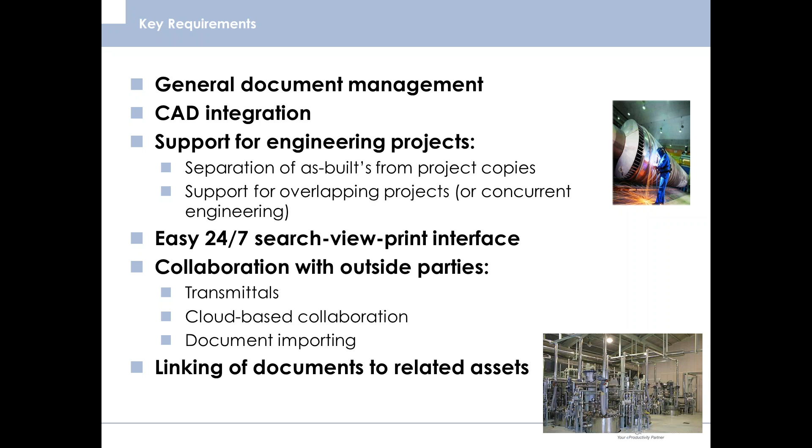We talked about having an easy 24/7 search, view, print interface where you could search for a drawing, but typically you're searching for a drawing that relates to a specific piece of equipment. So you might know the tag number on the piece of equipment, and from there you want to get the documents. It would be much better if you could just go to the piece of equipment you're interested in and automatically grab all the documents for it. That's something else we're going to be discussing and showing in the presentation.

In the demonstration coming up, you're going to see a typical scenario where, via Maximo, an example maintenance or asset management system - there's others out there, SAP Plant Maintenance, Oracle, Archibus, really works the same with all of them - maintenance locates and marks up a drawing for a small required change. Once they've done that markup, engineering automatically receives an email notification of the markup from maintenance with a link to the marked up document.

Engineering will then see that this drawing, where maintenance is requesting or notifying of a small change, is actually assigned to a major project. So now we've got some concurrent engineering going on. The drawing is going to be assigned to a work in process folder designed for handling small changes like this.

The new master or as-built is going to be updated when the small change is done, and then it will be flagged and notified that, as a result of this, the copy of the drawing being worked on in the major project folder is out of date. It will be flagged so that the major project copy can be synchronized with the newly updated master or as-built. So you're not getting those changes all out of sync with each other and then, down the road, have to try to put it all back together again. And then work on the major project can continue.

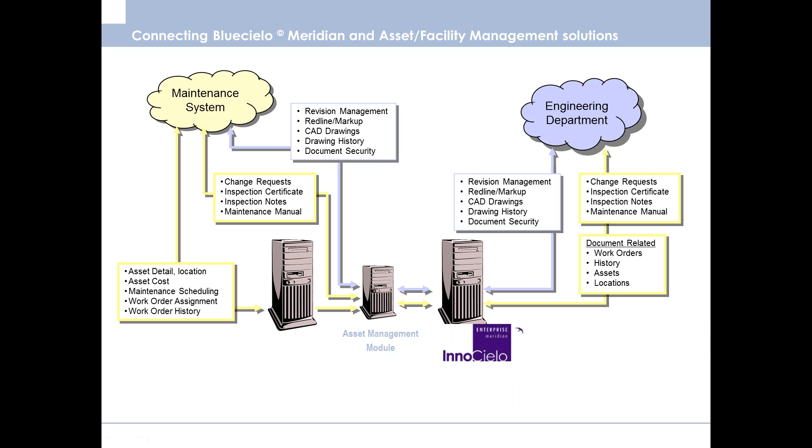You can also do your maintenance scheduling and work orders, where the idea is either from an asset record or a work order record, click a button, and you've got all the documents related to the piece of equipment in a single click. Here you can see inside the Maximo client, we can see our equipment record, equipment number, its parent, description, supplier information, replacement costs, and then with the click of one button, this window will come up, and here's all the drawings and documents related to that piece of equipment.

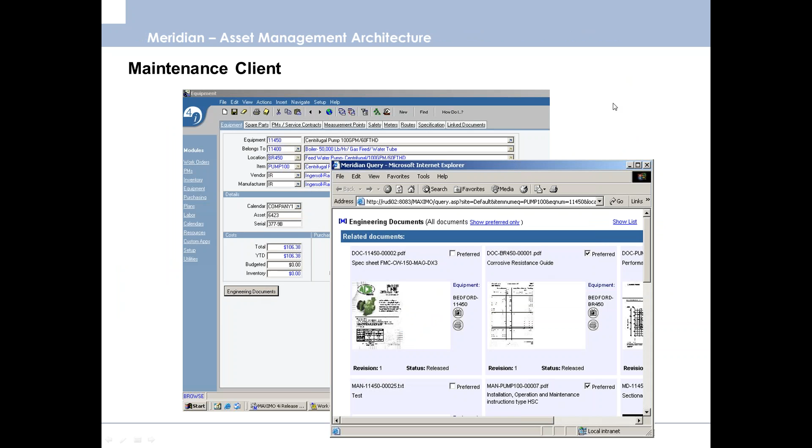This information and these links and relationships are available inside the main Meridian desktop power user client or power web client. Meridian has a 24/7 search, view, print client called the Explorer, and all of the equipment records, documents, and their relationships are available in there, or again can be retrieved directly from the maintenance system user interface.

So I think the advantages are kind of obvious. Maintenance is more productive, with more wrench time, because before they do something, they're not having to search around through computers or file cabinets to find documents. They also don't have to go into engineering to get help finding the correct document, which keeps engineering more free and productive. So your equipment repairs get done more quickly, downtime is reduced, and there are fewer errors because people aren't using incorrect or outdated documents, which relates to better plant safety, better maintenance of certification, and licenses to operate.

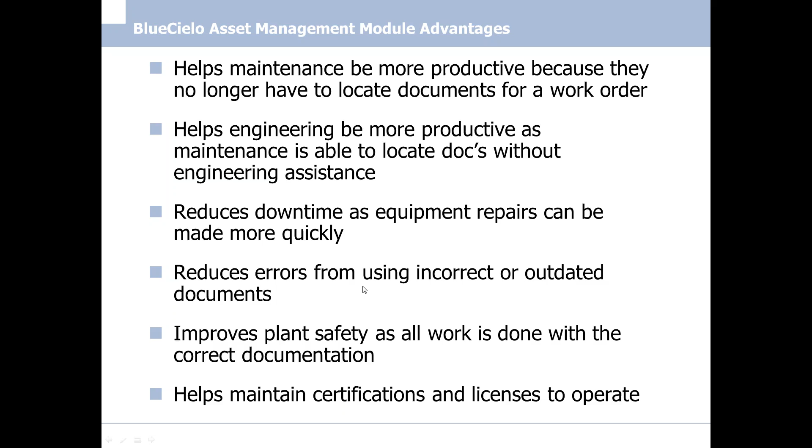The current process, of course: maintenance planning creates a work order, maintenance operations receives the work order, then they've got to go find the documents, which is a non-value added task that may require engineering assistance, then they do the work.

With the asset management in place, maintenance planning does the work order, operations receives it, and they don't have to go looking for drawings, they just go right to work.

Now just to get a quick introduction to what this looks like inside the main Meridian Power User client that engineering would use, we're going to take a look at a quick presentation here.

In this video, we will be looking at how BlueCielo can be used to manage engineering content in relation to your asset management system. Basic knowledge of the BlueCielo Power User Client is recommended before viewing this tutorial. For this demonstration, we will be using a BlueCielo Vault that has been configured with the BlueCielo Asset Management module, which is used to connect engineering documents in the BlueCielo Vault to objects and tags in your asset management system.

The BlueCielo Asset Management module adds the following predefined folder structure to the BlueCielo environment: Tasks, built to manage the functional plant structure; Objects, to manage all objects like control loops, tags, equipment, pipes and lines; and Projects, for design, engineering, and construction projects.

At this point, I want to get into the integrated demonstration with a presentation from Chris Angridis from BlueCielo ECM Solutions. First off, we're going to take a look at the first part of our demo workflow, where maintenance is in the asset management or maintenance system, finds a document, marks it up, and submits it to engineering. We'll take a look at that here in just a second.

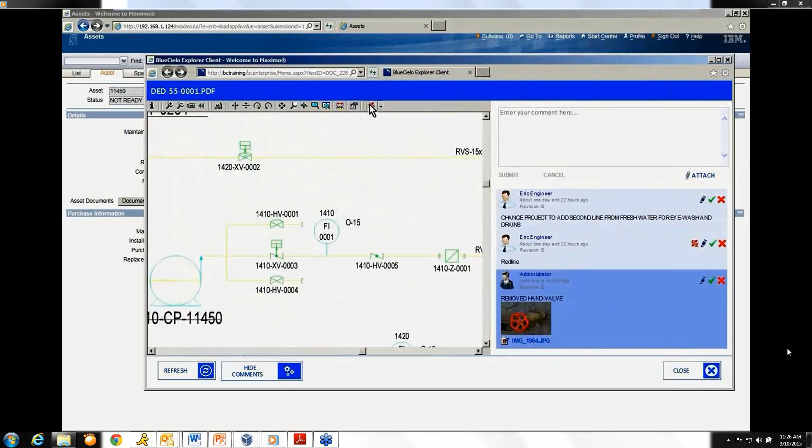What I'm also going to do is mark up the drawing and show where on this P&ID the valve existed. So I'm going to zoom into the area that I'm going to redline, and with the markup tools, denote that this valve was removed, and even add more information here. For example, removed hand valve, no longer in use. Okay.

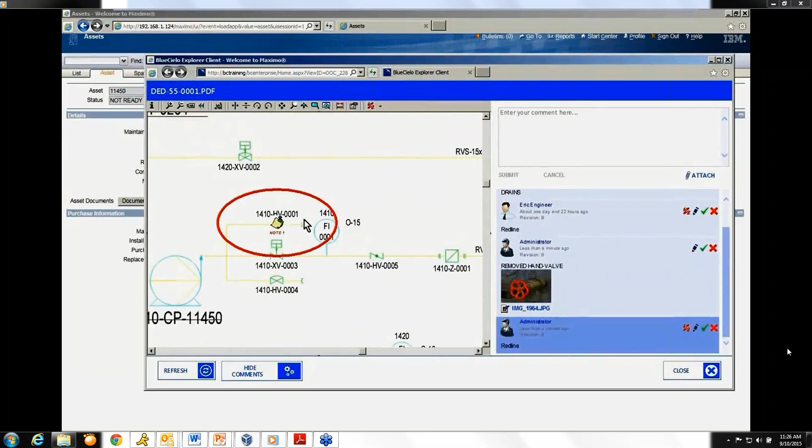And this note, of course, is going to stay with the document as the document and commenting progresses. What's interesting is that my red line I just created here, let me zoom out so we can see everything, is actually independent of the red line from the engineer user. I can click on either one of them, and I can see independently which red line was made by each person. Okay, so let me close that, and I'm going to go back to the presentation to see where I am.

All right, so that's the first part of our demo where we've seen how maintenance has used the tool to find a drawing, do a markup, and submit it to engineering.

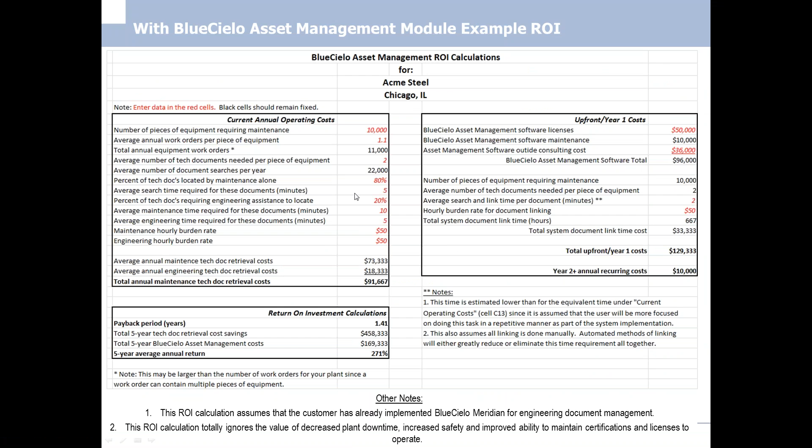What we're going to see next is engineering making use of the Advanced Project Workflow module and its concurrent engineering capabilities to find that the change maintenance has made affects a drawing that's actually out for change on another project.

That gets really complicated in being able to manage those overlapping ongoing projects while keeping the as-built available for maintenance. And that's what this tool is designed to do.

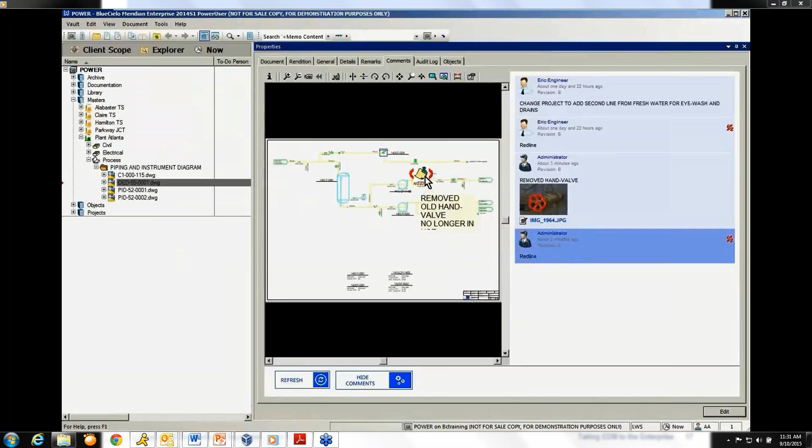This change was made by the maintenance person. So we'll make a decision here to go ahead and make this change. Now, at the same time, let me click on the document tab.

We see that there's actually another project copy checked out. From this perspective, the engineering manager can see the other project copy. For example, in this case, this is the master document, and clicking on the project copy shows us it's in the major construction project, and we can see what's going on with those.

We can compare those documents as well. I'll compare this a little bit later on when we make changes to this document as part of our maintenance change. So I'm okay with that, and now we're going to go ahead and add this document to a work in progress project, which is a small work order project.

From the context menu, the engineering manager can simply create a project copy. In this case, we're going to be creating a second project copy. The first one is in the major construction project. We're going to go ahead and make one in the work in progress, for example, a small work order project.

This dialog box is pretty interesting because the master document has a couple of CAD references. A pump and a vessel document are being referenced into it as a CAD reference. In this case, we want to copy these into the project as well because they might change. In this case, those are not going to change, so I'm going to leave them where they are. That's very powerful, allowing me to take those reference documents and put them into the project as well.

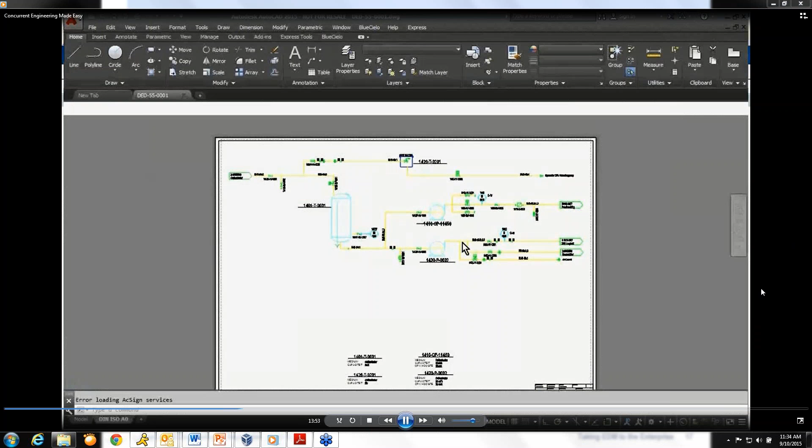We're going to make the changes in model space, so let me switch to model space and zoom into the area we're going to make a change. The simple change we're going to make is simply removing this hand valve, and just press delete.

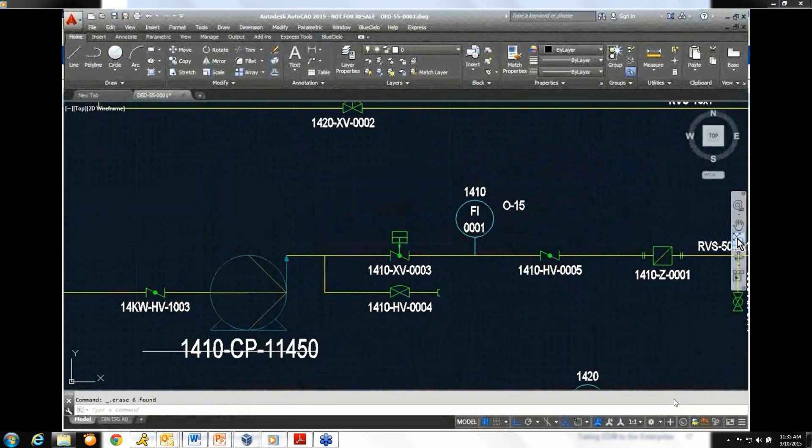That is done. If we're done, and in this case the designer is finished, we'll zoom out and make sure things look okay in the layout. If we need to, we can always update the vault or update the properties from Meridian directly from our CAD application, and this also works directly from the web application too.

So let's close our document, and we'll minimize CAD because we're going to use it later. As far as the designer is concerned, they're finished. They simply upload the document to the server and pass it on to the next step of the workflow.

For example, in this case we're going to go ahead and start the review. Now the review process depends on the design, and on any kind of workflow process or mechanism you guys have configured. In this case, I'm asking the designer to say, hey, what is this change for? It's for an as-built.

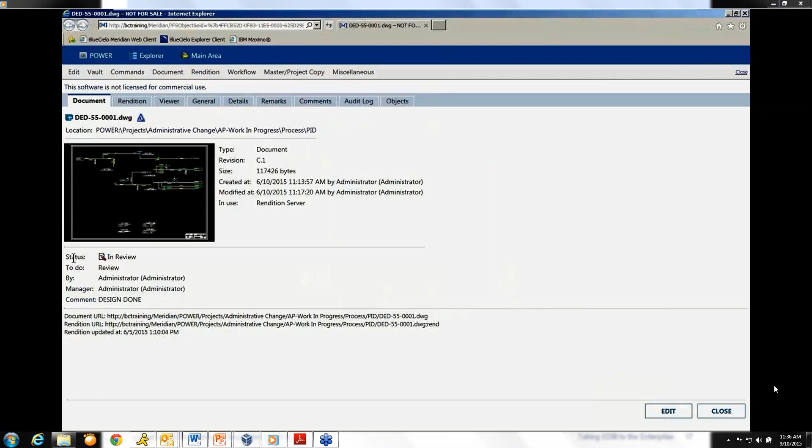As far as the designer is concerned, they're done. They can close this card. For example, this document is now in review, and they can close this card and go on to work on other documents in their projects. Using the navigation capabilities, they can filter and show only their documents and continue working.

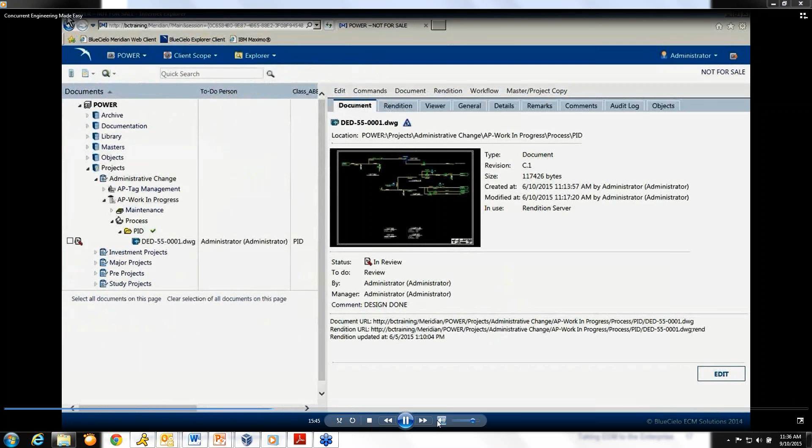So let's leave the designer from their home office, and we'll go back to the corporate office where the engineering manager is checking their email. We see that they are now the to-do person for this document, which is now at revision C1 and needs their approval. Very simply, we jump to the Power User Client, and again these links put you directly on the document at hand. For example, in this case it's our project document, and it just needs to be reviewed.

Let me turn on the viewer to make sure the geometry is up to date. Yep, looks like the geometry is up to date from our designer. In this case, what I'd like to do is compare the documents and see what kind of changes have been made, especially compared to the last released or even the next project that's out there.

To do this, I'm going to use the project browser again. I can compare one project copy - I'm going to hold down the control key and highlight the next one - to see what needs to happen to this document to compare it to this document, which is my other project copy. We'll get a compare window that shows us the original document, which is the one our drafter just changed, in the top left, and the next project copy in the other window. In the third window, we'll see all the changes.

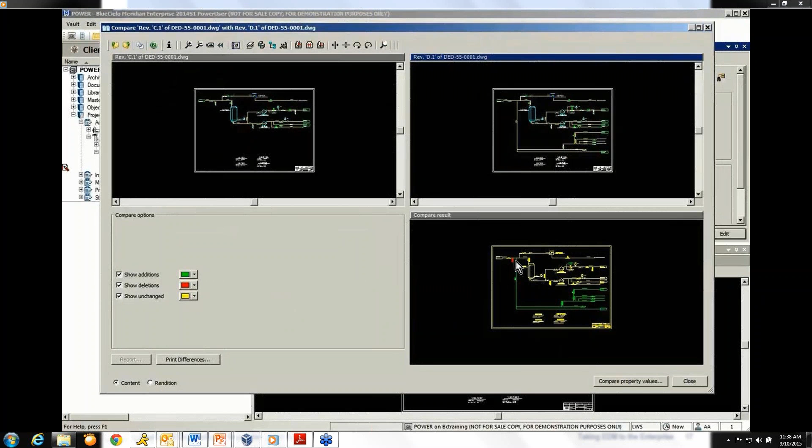I'm going to zoom into a part of it here, and we see that the valve we removed is still in the other project copy. We see the other project also added another line and also removed another valve here. Very easy to see and compare.

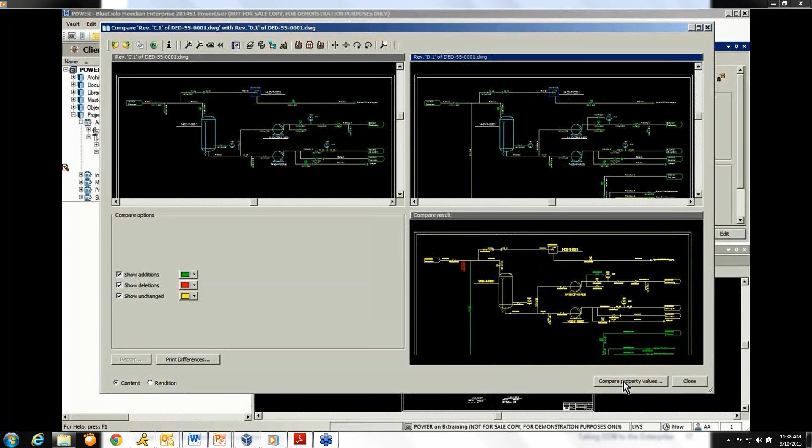Also, the comparison goes beyond that - it goes into the properties as well. For example, we see the revision number has changed, and also the properties have changed, like the title. So all those comparisons are available. We're done with that, so let's go ahead and close it out. From the perspective of the manager, we're done, and we go ahead and approve this document.

And this approval status is approved. We're done.

So now we're ready to release it as a master. In this case, we're going to notify everyone that's interested, for example the maintenance workers. We're going to go ahead and tell the system to release the document as a master.

Keep in mind that this is the very first document being released. In the next project, we'll see that these options may change because we now have a new master. We'll get to those in a second.

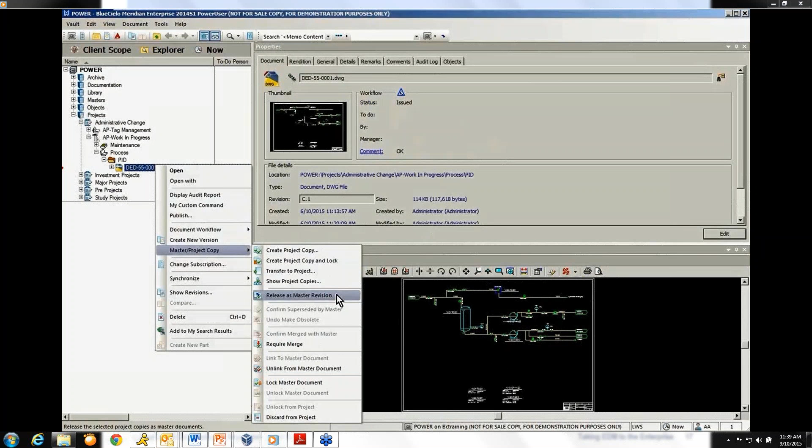As soon as we do this, notice one thing happening in addition to all this: our project copy is automatically put into an archive location. This archive location can trigger your company's document retention rules. We'll go ahead and shrink this out in a second.

Now we see our brand new revision, our brand new master, and we can see that this document now has one project copy checked out, which is the major construction project. It's all red with notifications saying that the master document has changed since this project copy was checked out, which is very important.

Okay, so let me pause for a second. Alright, hopefully that gives you a good idea of how that process works. Now I want to jump ahead and show a couple of the tools available to merge in those changes. So we're going to move to that area next.

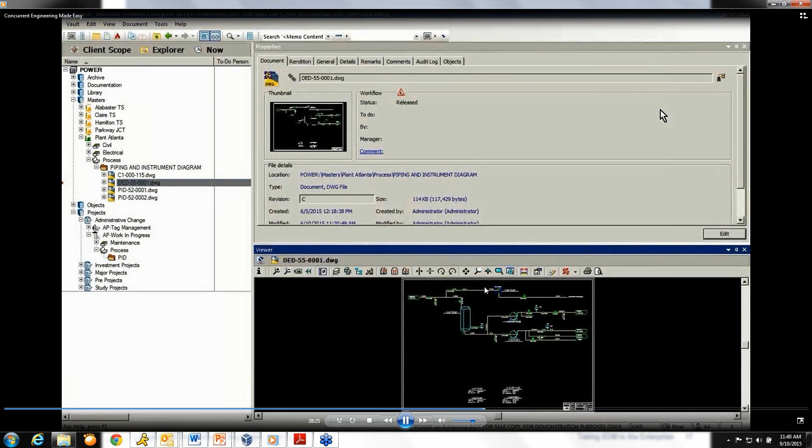We're done with email for a while, and here we are in Meridian looking at the latest master of this drawing. And we do see that we have a project copy checked out still, and this is our major project copy, and we compared it as well.

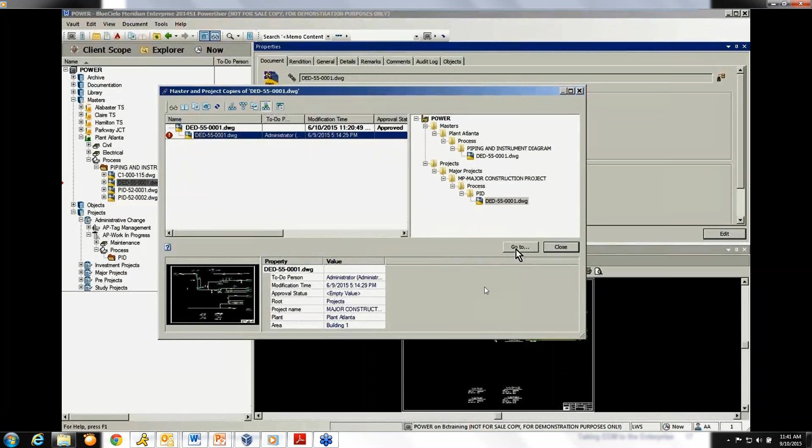So we know we need to give it some attention before we release it. Now, the changes that have been incorporated here are the ones that came back from the contractor. So what I'd like to do is jump to this document, and what we need to do now is essentially merge the changes and then release this as a new master.

Now, how do I know we need to merge the changes? Some of the concurrent engineering functionality that's implemented allows the user to check on this and know what's going on. For example, I am not allowed to release this as a master just yet.

That option is not available because we have a newer master than this project copy. That's very important. So what we need to do is confirm that we merge the geometry, and that's what we're going to do right now.

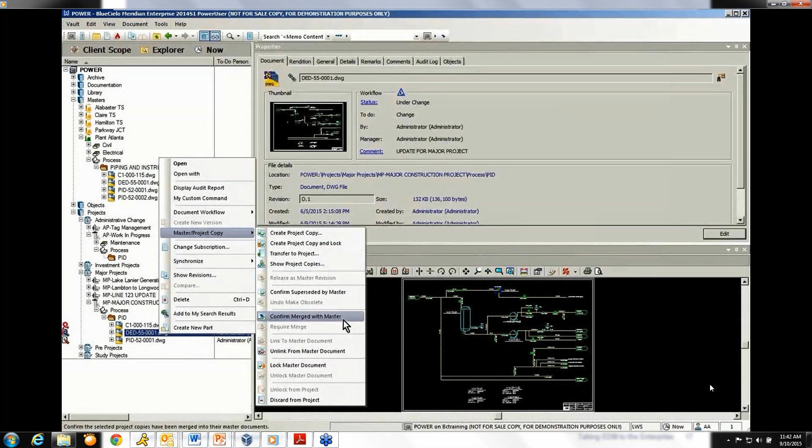So at that point, the merging is really an AutoCAD function where that main project copy is edited, copy, paste, edit, either from the new master or from the project copy. Then you can confirm that it has been brought up to date, so you can continue on and release it as a new master when you're done.

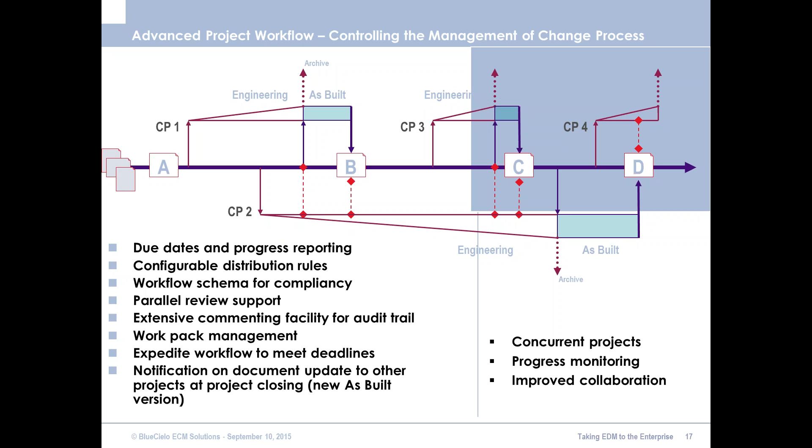So hopefully that gives you an idea of the tools and how that works, and hopefully that's ringing some bells with the kind of workflows that you do within your organization and some of the challenges you have. Again, this summarizes the workflow that we went through.

But one thing here is, this was all really done as kind of an internal, inside-your-company workflow. However, as we mentioned at the beginning, a lot more work is being done outside your organization, and that's where the BlueCielo Meridian Project Portal comes in.

So far we looked at master data in our masters or as-built folder, work in progress data inside project folders, and using the advanced project workflow. All of that information is in the Meridian system on your internal network.

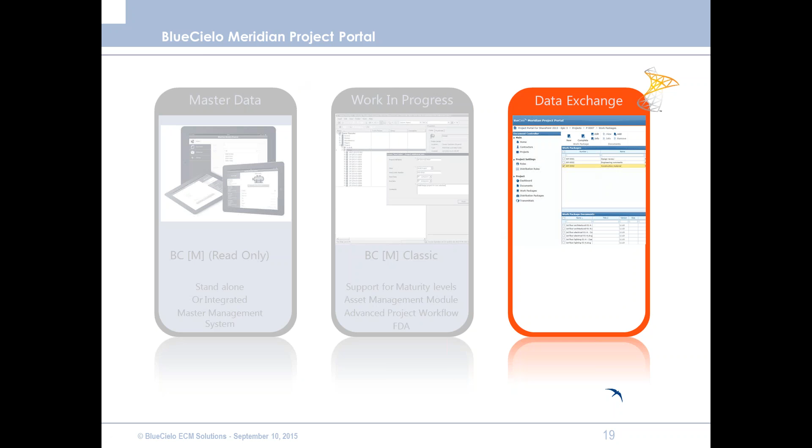But now with the project portal and its data exchange capabilities, it extends all this functionality so that you can integrate work from outside engineering firms and contractors into that same workflow.

The project portal is not actually released yet, it's coming out this fall. I want to go ahead and preview it and talk about it a little bit. It's really designed, as this graphic shows, for really complex supplier networks.

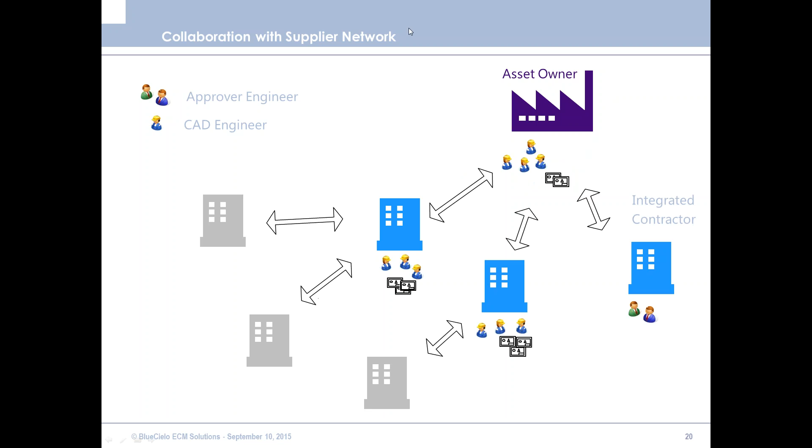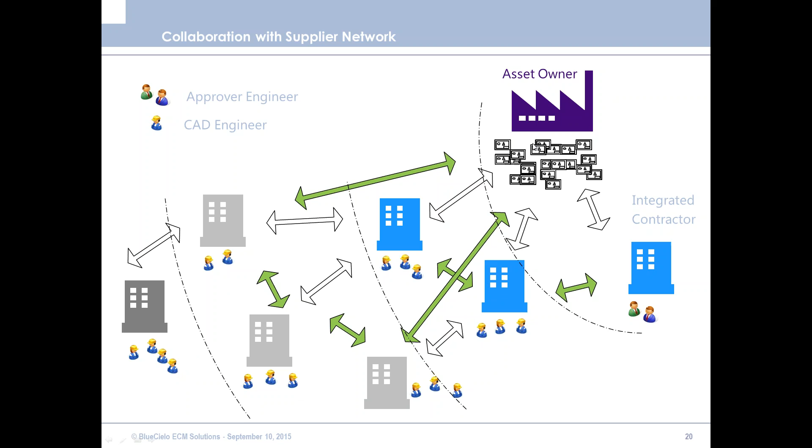So a company's got multiple first-level suppliers sending information back and forth with the contractor, and those first-level suppliers may have suppliers of their own. The project portal is designed to synchronize down to multiple levels to keep your projects on track, and then all the changes synchronize back to your vault.

Some of the key capabilities of the project portal: it gives notifications. In the project portal cloud, there's viewing and redlining capabilities built in, full audit trail so every touch of a document by an outside party is tracked, the ability to mass upload document changes in batches and read data from an Excel file, tools for work package handling, setting up recipient lists, setting due dates with reminders and warnings, gathering online reviews, gathering comments, doing submittals, and lots of reporting and dashboards built in.

The project portal actually has its own full document control environment there in the cloud, but then it can also be set up to automatically synchronize with the Meridian server in your office.

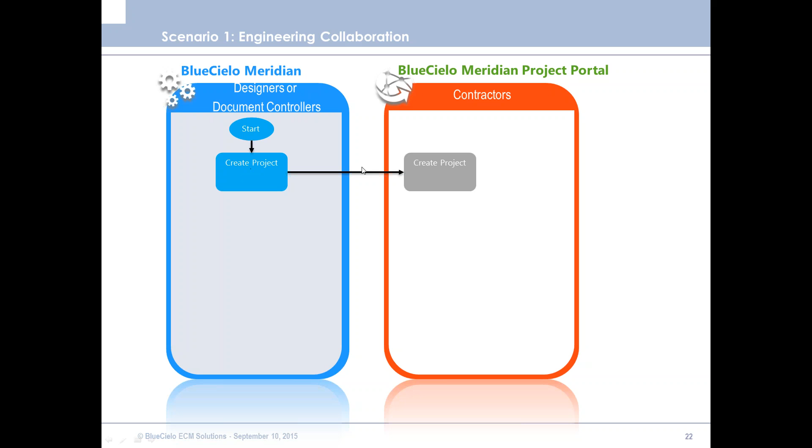Just some scenarios you might see: in Meridian, inside the Meridian Vault within your company, somebody might create a new project. Well, then with the synchronization, that project folder will automatically be created in the project portal, and then you can assign contractors to that project portal. And in Meridian, like we saw with the advanced project workflow, documents can be assigned to the project, then they will be automatically synchronized to the project portal, where they're under full security available for the outside engineering firms to download and work on.

They make their modifications, it goes back up to the project portal, which can then synchronize down to an incoming files folder in Meridian where they're reviewed and verified, and then the project in Meridian is updated, and once it's approved, your new masters or as-built would be released. So it kind of takes what you saw earlier and extends it out beyond your firewall.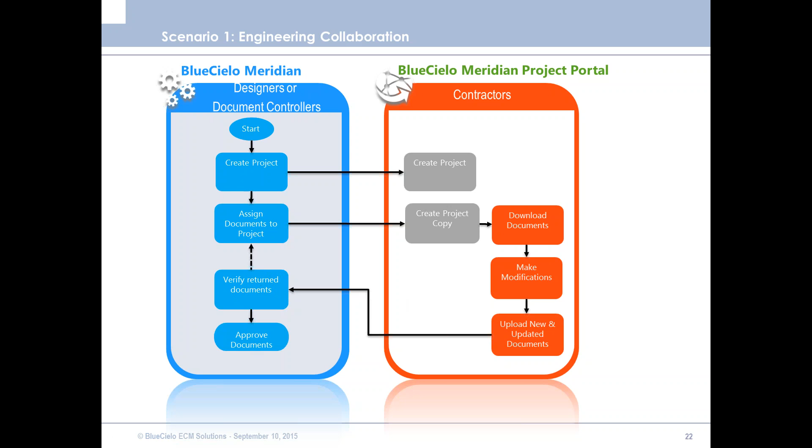And then a couple of these other slides just showing some different variances in work scenarios that can be handled with the project portal.

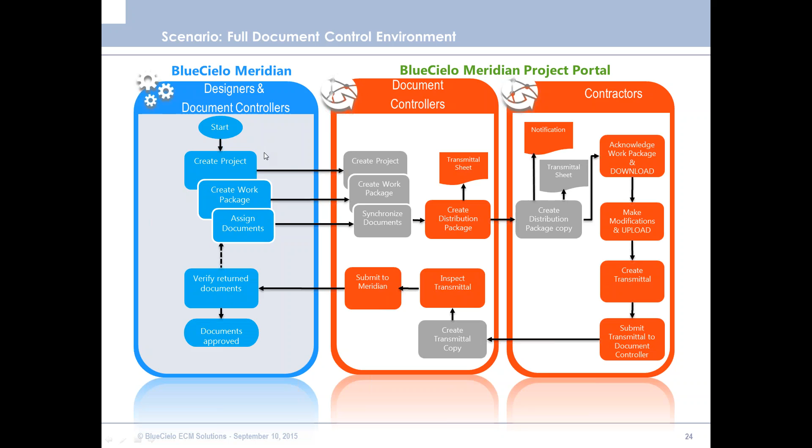So the project portal can actually be implemented in two different ways. It can be on-premise, based on a Microsoft SharePoint backbone, installed on-premise within your company, or in the cloud. And the cloud is really, I think, the preferred way to go for most people.

And there's cloud-based systems. The unique thing is, there's internal document management systems out there, and there's cloud-based collaboration portals out there as well. With this, it brings everything together.

So at this point, that concludes what I had down to show. And just summarizing, we looked at concurrent engineering with the advanced project workflow module, project collaboration using the project portal, and then maintenance integration with the asset management module.